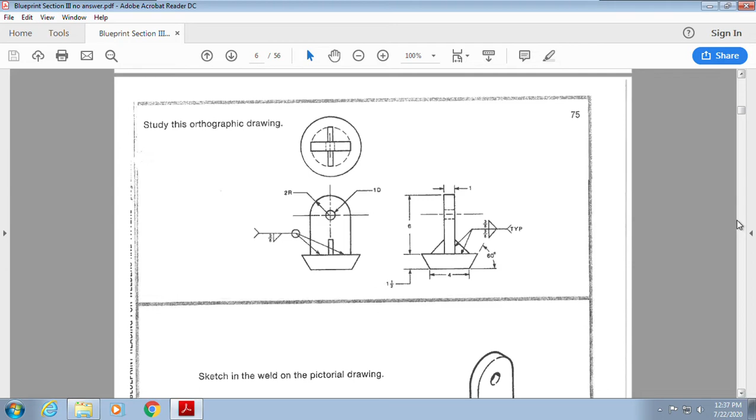Alright guys, I'm back. So we're working on Blueprint Reading Section 3. We're starting off at page 75. So I want you to really look at the drawings that are brought up here first before we make any type of determination. And I like to make it a little bit bigger, and that way I can actually see what I'm doing. Okay? So kind of look and see what is it and what am I supposed to do?

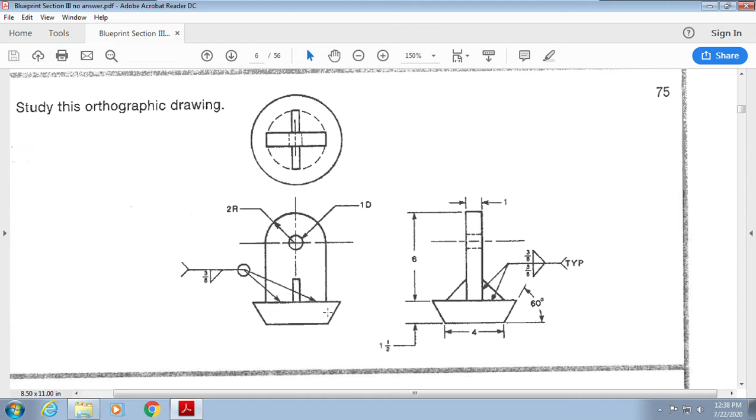So 2R. Well, this is telling me radius. This is telling me diameter. So it's saying radius is from the center to the outside, and then from the outside. Okay? So it's saying 2-inch radius, 1-inch diameter. This is saying I would like a 3/8 inch fillet weld all the way around on the bottom parts, on this bottom edge. And then when we look at this other edge, whoa, come back here.

And it took off on me. When we look at this other edge, it says typical. So anywhere that it says typical, so we have a joint like this on one side, and if it's a joint on the other side, we're going to do the same thing, typical. Okay, it's showing us the degree of bevel and how long it is. Okay, it shows us the thickness, and it also shows us how things are supposed to fit together, and that there's a hole in this, right?

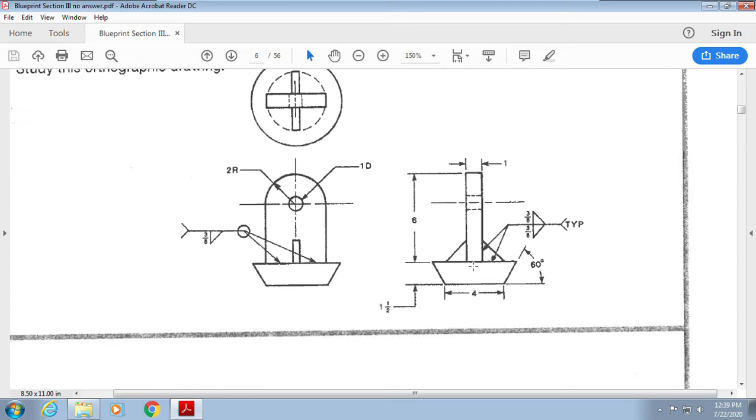Long, short, long shows me there's a center. And then it also shows me dashes for a hidden line. And it also shows me a center. So top, front, and side views. And it makes it relational. It's 6 inches tall. Okay. The only thing it doesn't give me is width. Okay. But I need to pay close attention to what I'm doing. So here's our pictorial view. So we're taking the orthographic view into a pictorial view.

And it says, what size is the fillet and extent of welding on the vertical member? What is the vertical member? Now, they ask, what is the extent of welding? Is it intermittent? Is it continuous? Or is it all the way around? That's what they're asking for. Okay.

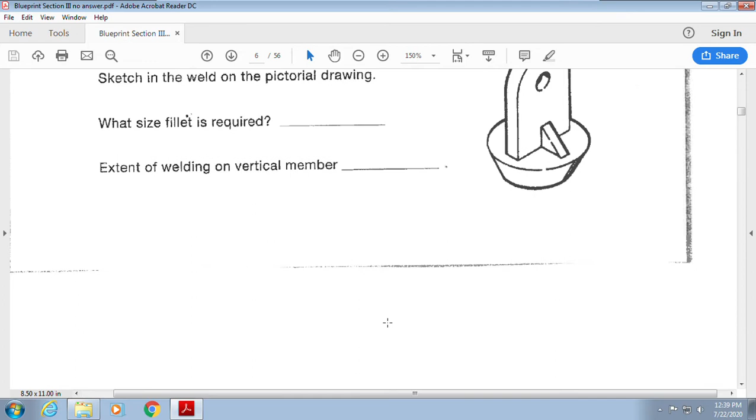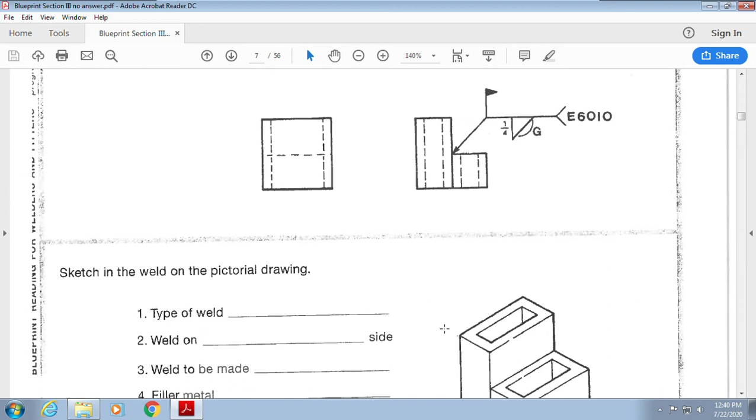Okay, page 76. Well, we want to check out this drawing. Let me make this a little smaller. Okay, so we can see that there's 2 tubes put together, looks like, right? And we can see the top, the front, and the side view. Okay, and it says weld this. So here it is. What type of weld is it? What side are we going to weld on? Weld to be made. They're talking about in the field here. Okay. What is my filler metal and what type of contour? So where am I going to see any type of notes on filler metal? Of course, my little fishtail.

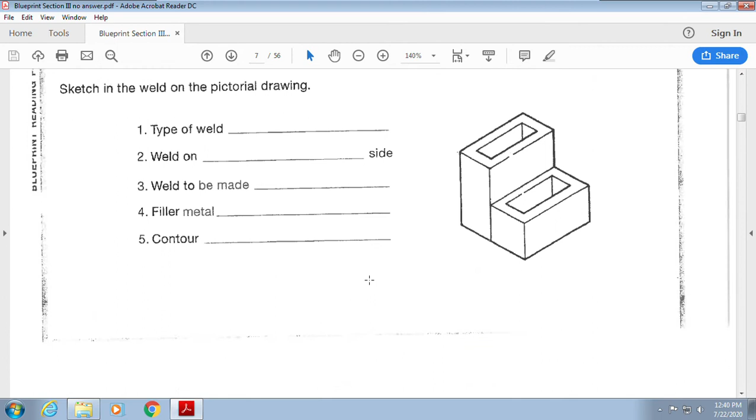Okay. All right, page 77. So this one's going to get a little bit more complicated. So we need to look carefully at our plan before we make any decisions, okay? So they call this the boss, a boss. I call it a pipe. Really, that's what it is. So we have one 6-inch diameter, and we have one, looks like a 12-inch diameter here. Okay, and then this one is an 8. That makes no sense. Oh, I get it.

Okay, so the diameter from here to here is 8-inch inside diameter, and this is a 3-inch inside diameter. Outside diameter is 12, and outside diameter is 6. This is what I'm talking about, having to look and look at things carefully, okay? Okie dokie. So this is what our stuff is going to look like. And they want you to also draw where it should go. So extent of welding both joints.

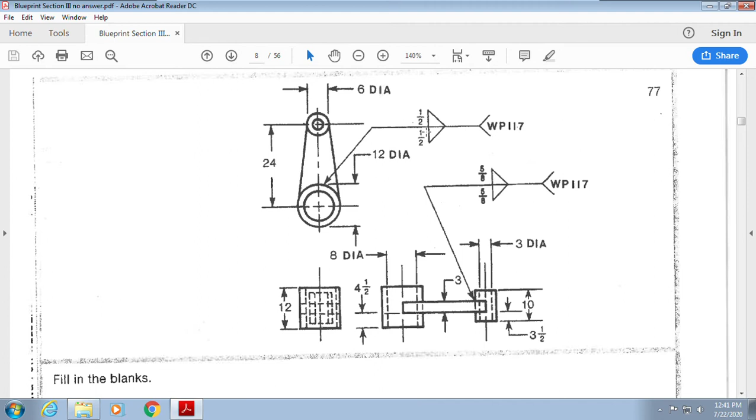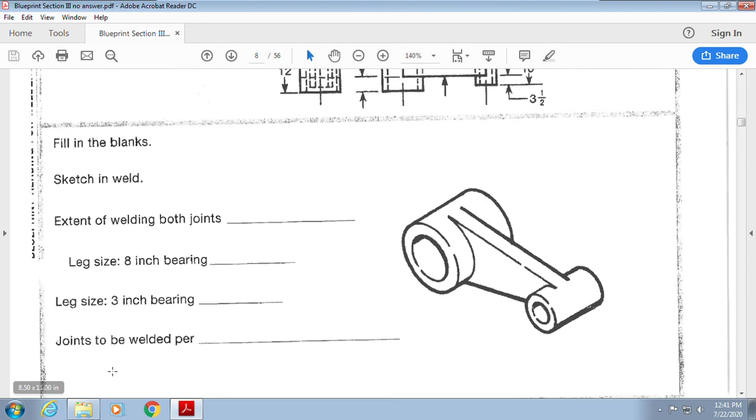Well, what is my extent? Where's my extent at? Okay. Leg size 8-inch bearing. Well, we know that this is an 8-inch bearing. So what is the size? So we're going to have to look and see, well, where did that go? Right here. All right, so what is my leg size? Leg size for my 3-inch bearing. So we know this is the 3-inch. Joints to be welded per, where's my note? Okay, right here. All right, let's keep going.

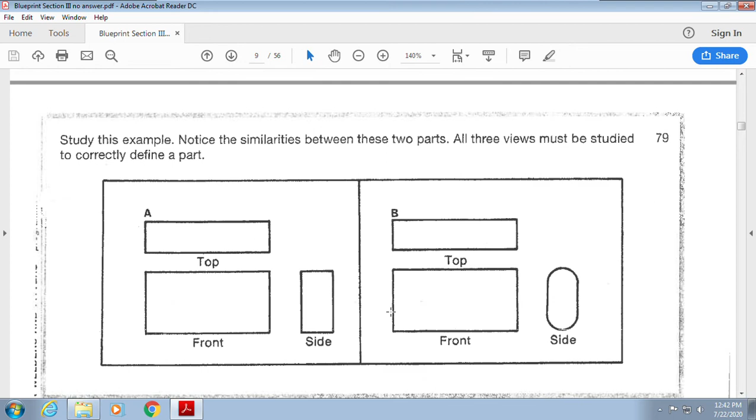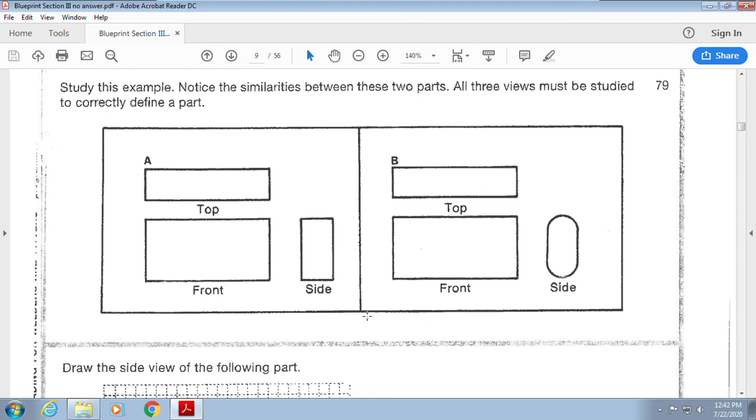Page 79. Okay, now these ones can start to get a little confusing as we go. But ultimately, we need to understand that looks can be deceiving. So if we look at the top views, the top looks the same, the front looks the same, but the side is the only thing that's different. So you need to make sure that you take all the views into consideration before you decide what it is. Okay, so I'm one of those who will jump to conclusions because, oh, I already know what it is. If I don't see this, I just screwed myself.

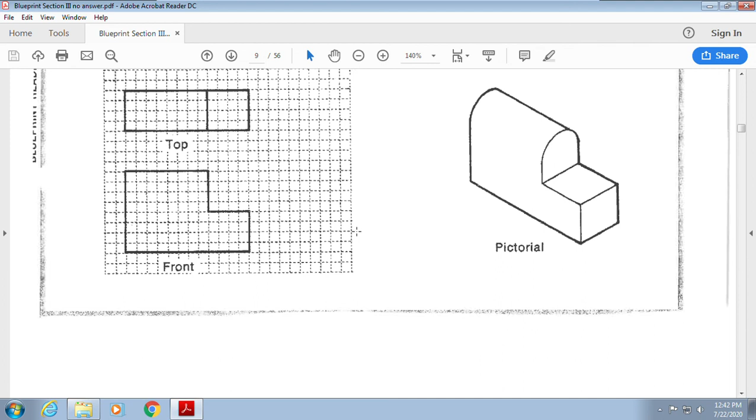Okay, so here it is. Here's my top, my front, and they want the side view. So what is my side going to look like? Well, I need to draw this as well as this. So make sure that you're using the correct type of line when you do this. Okay. All right, one more.

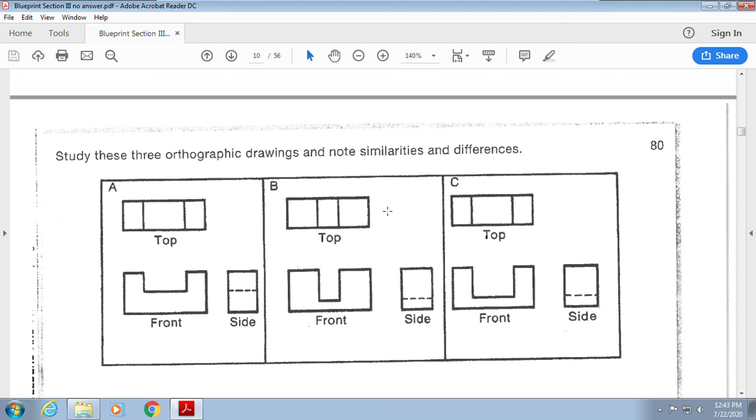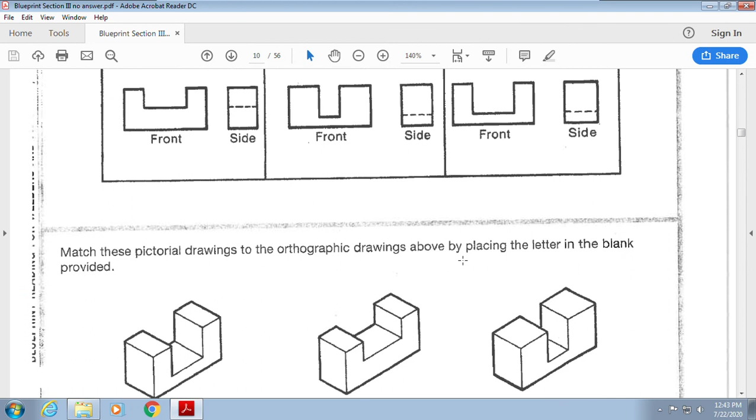Page 80. So we're going to use these orthographic drawings, A, B, and C, and they want you to kind of put them with the correct pictorial view. So you need to be able to look at all of the ways that it's looked at. This one is wider, this one is shorter, this one is happy in between. Okay, so we need to look at all of the information that's given. So this is a taller one and this is shorter. So we need to make sure that we're putting this in the correct area and looking at it carefully.